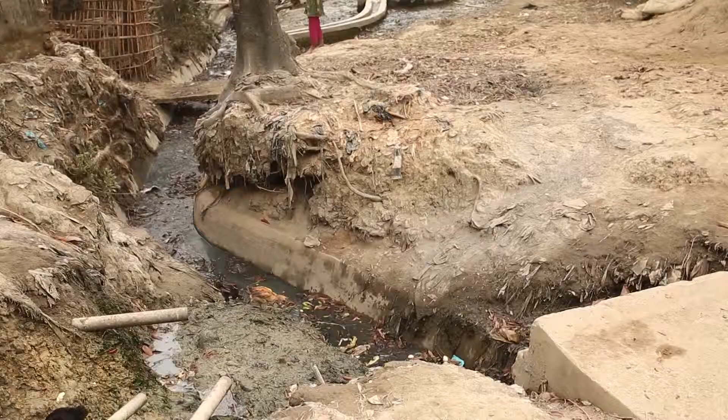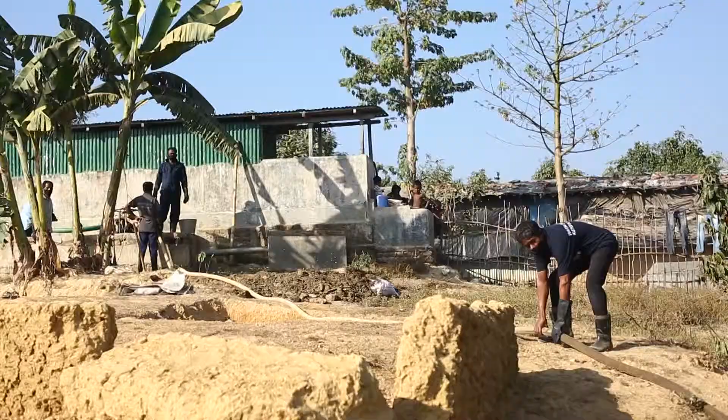Ensuring proper sanitation and hygiene for 32,000 refugees in a crowded area is a challenging task. Particularly, proper disposal of human excreta is crucial for an uncontaminated environment and also to prevent spreading of diseases. Considering all the camps from ACF experience, more than 3,800 cubic meters of human sludge needs to be removed and disposed every year. ACF sees biogas technology as one of the ways to manage human excreta and provide a safer environment to the refugees.

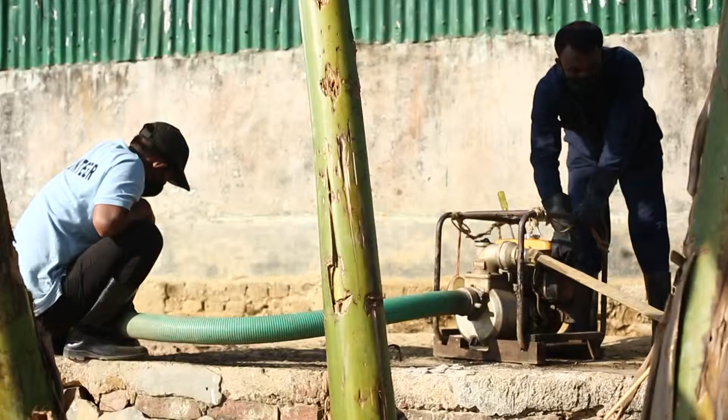With the traditional sanitation system in our camp over the last 20 years, the main problem we face is that the tanks need to be desludged at certain intervals, sometimes in 15 days, sometimes in 1 month. We considered different kinds of technological options for waste treatment, mainly fecal waste, because in the camp there are many limitations. We have space scarcity. In our camp context, biogas will be the most suitable technology for waste treatment. Quite recently, we introduced biogas. The aim is to reduce human excreta disposal in the outside environment.

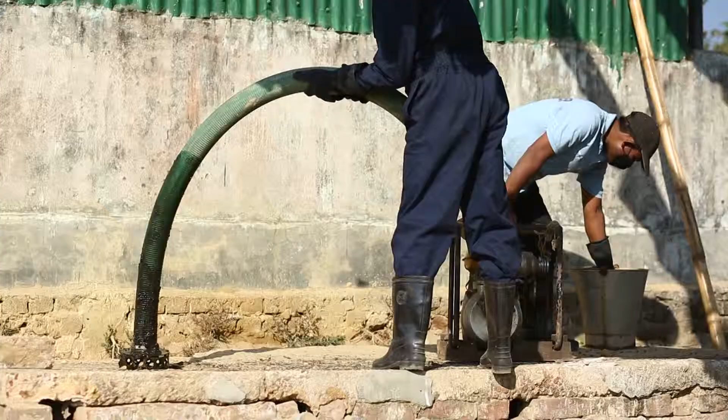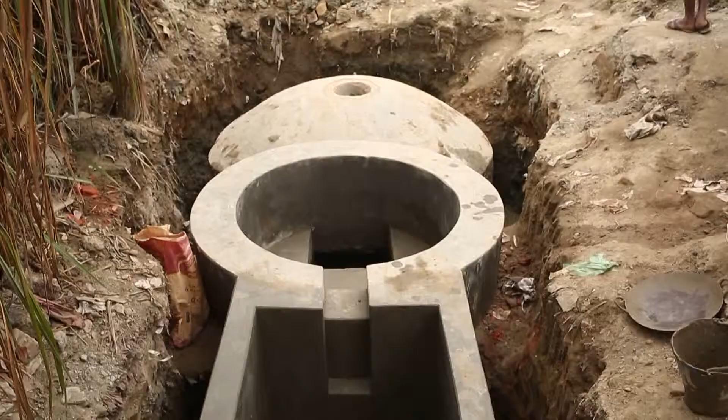Provision for energy needs, safe water supply, waste management and conservation of environmental quality are among the topmost challenges in refugee camps all around the world. From our side, from UNHCR, we tried to introduce several options, like septic tanks and soak pits. And then we thought there is a good option that can have very good treatment facilities and will also generate biogas. We decided that a fixed dome plant will be best in the context of the camp.

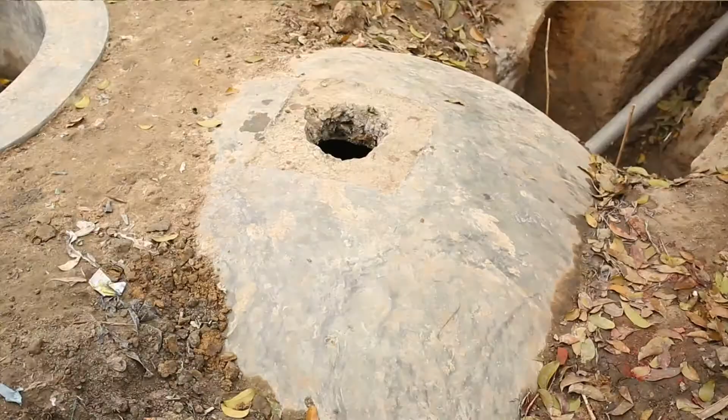The biogas technology requires both scientific and engineering inputs for construction. We have to think about the dimension, what size the biogas plant will be. It depends on how many users there will be, how much human excreta will be generated, and how much organic material I can use. For good biogas production, the C/N ratio of the raw materials should be 30. So we also thought about adding some additives or admixtures to increase the C/N ratio. We have to consider not only the dimension but also the construction materials.

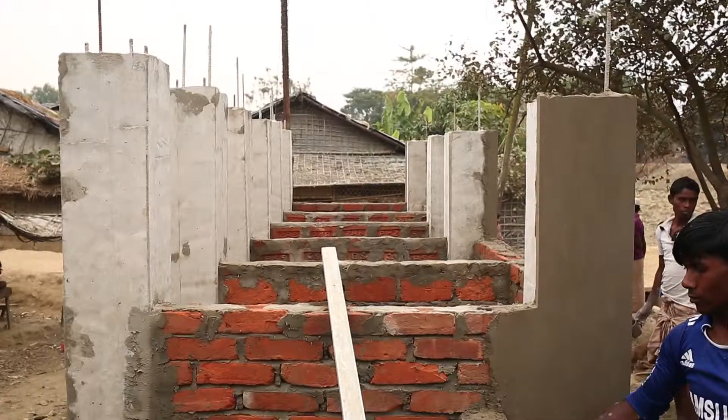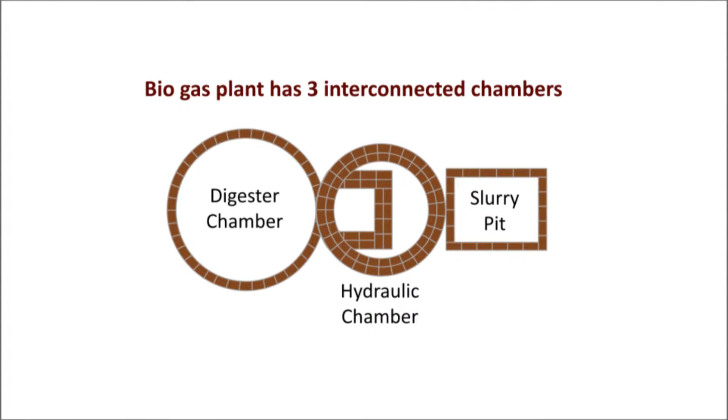For the construction of the biogas plant, we maintain some design criteria. An ideal biogas plant has 3 interconnected chambers: the digester chamber, the hydraulic chamber, and the slurry pit. The volume or size of the biogas plant is designed considering the amount of sludge to be handled. The construction must follow precise steps. Let's take an example of a 2 cubic meter biogas plant.

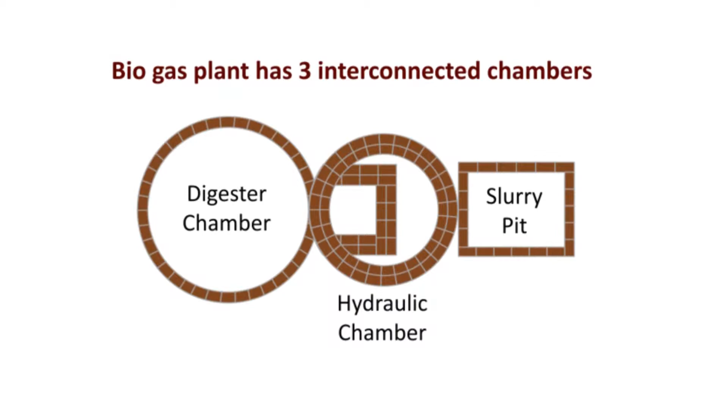First, the site has to be excavated to a depth of 6.5 feet with a diameter of 8.5 feet. A layer of sand of 3 inches thickness has to be added. Then, a polythene sheet has to be spread over the sand and a 3 inch thick brick soling has to be prepared over the sheet. A layer of 4 inches of reinforced cement concrete has to be poured over the brick flat soling to ensure the chamber's stability.

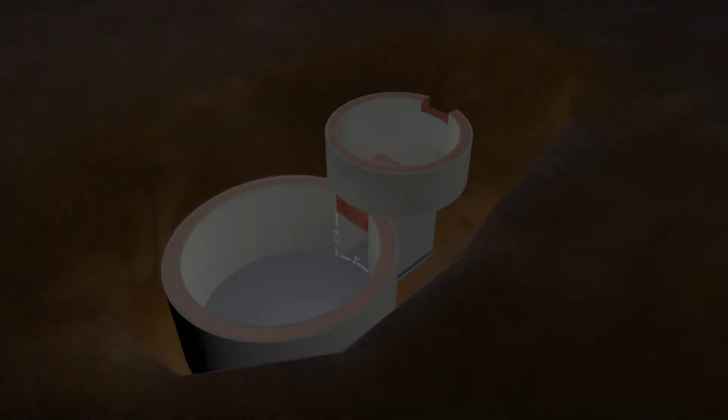10 inches of brickwork with mortar has to complete the sides of the digester chamber until a height of about 3 feet 5 inches. A gateway of 2 feet 7 inches height and 2 feet width has to be kept between the digester and hydraulic chamber. For the hydraulic chamber, a circular chamber of height 2 feet 6 inches from the top of the gateway and of diameter 6 feet 2 inches has to be constructed.

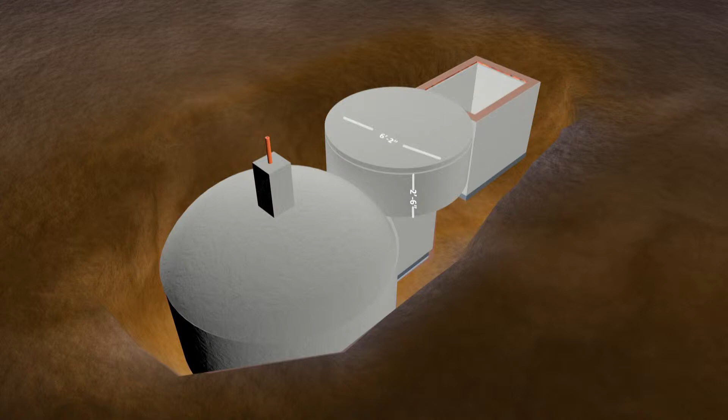Next step includes the construction of an arch over the digester chamber, which looks like a dome of 1 foot 3 inches height. The RCC roof of the hydraulic chamber will be of 4 inches thickness. In the upper portion, an outlet of 6 inches will be opened to adjacent slurry pit. The dimension of this chamber is 4 feet 10 inches and 3 feet 10 inches with effective depth of 3 feet 6 inches from the top of the hydraulic chamber.

To prevent gas leaking, 3 different layers of plaster have to be provided, where the first and the third layer have to be mixed with padlo. A final painting with an enamel paint layer is to ensure total impermeability of the biogas chambers.

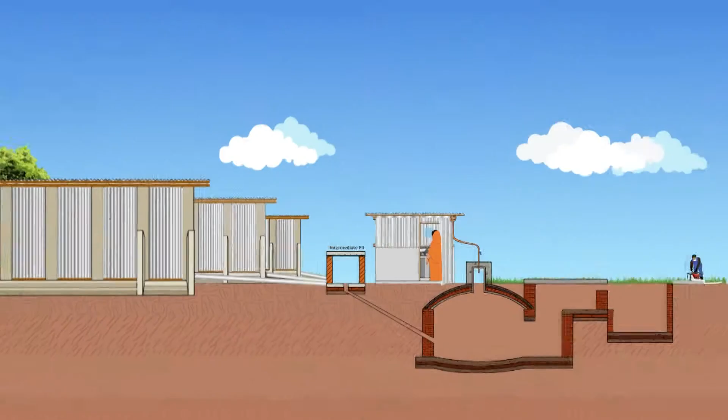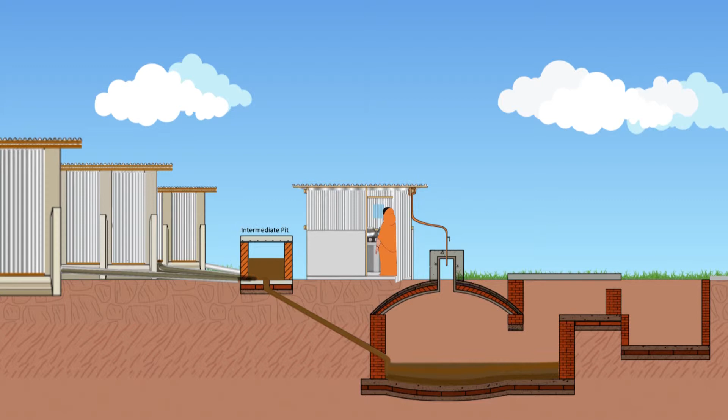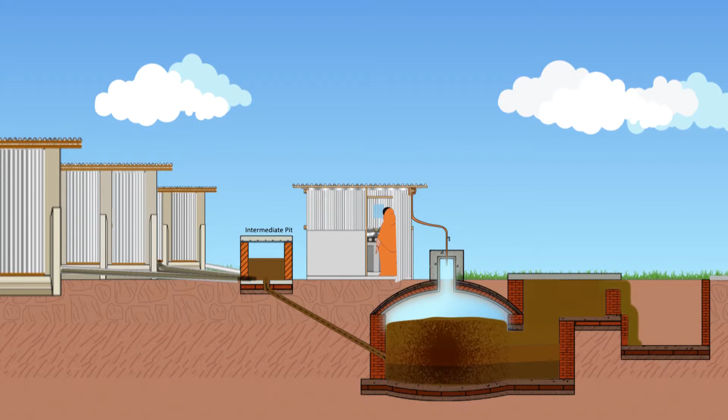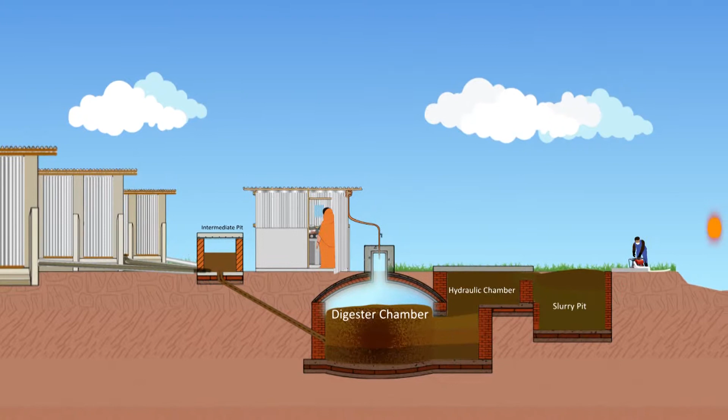All the human excreta firstly come in the intermediate pit from the connected latrine blocks. Then they are received by the digester. In the digester, 3 degradation steps take place in anaerobic condition, which are hydrolysis, acidification and methanization. In Bangladesh climatic conditions, it takes 20 to 30 days to get the first gas production, which contains 60 to 70% methane. The substance resulting from this process goes to the hydraulic chamber where aerobic degradation occurs.

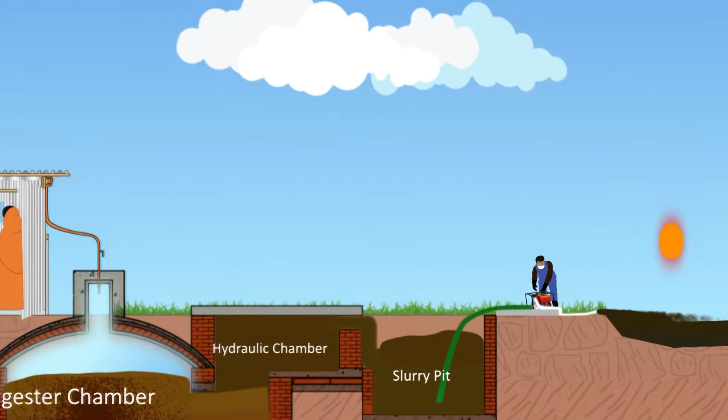Then it overflows to the slurry pit. The final sludge contains 93% water, 4.5% organic and 2.5% inorganic matters, which is less harmful. Finally, with appropriate transformation processes, the slurry can be valorized as manure.

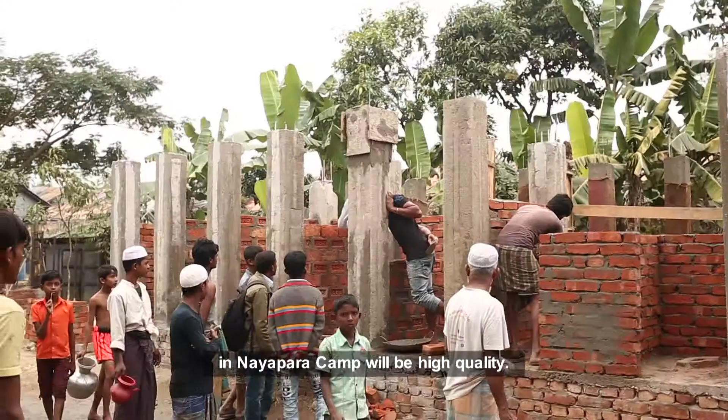To increase community-level awareness and acceptance of biogas technology, ACF continues to work with community people and community leaders such as imams.

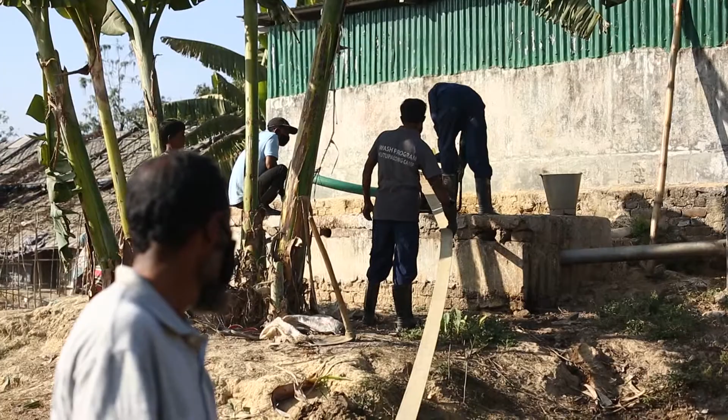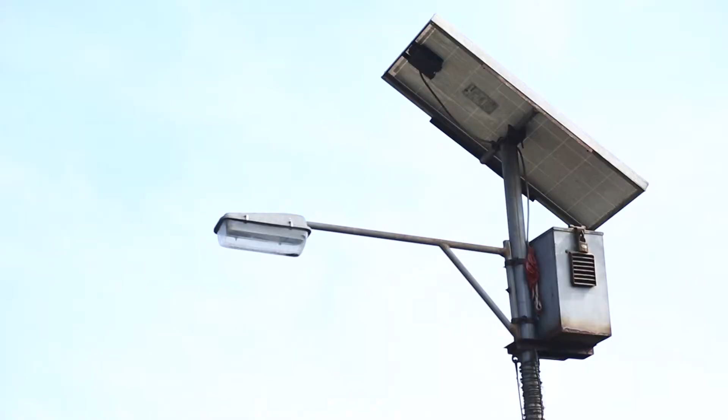Construction of biogas plants in the camps has improved latrine conditions and surrounding environment by reducing bad odor. All camp residents, women, children, and men benefit from this new technology that provides them with healthier living conditions. Biogas technology has the potential for future development in terms of alternative energy sourcing and further usability for biogas.